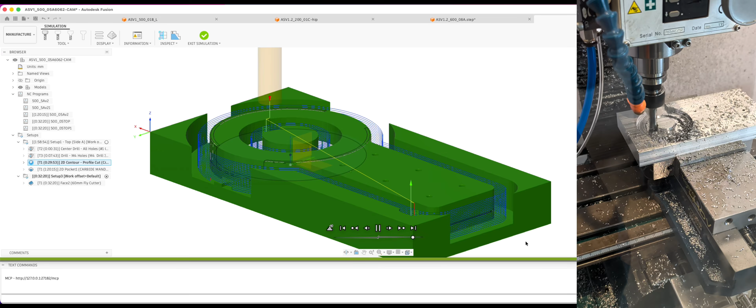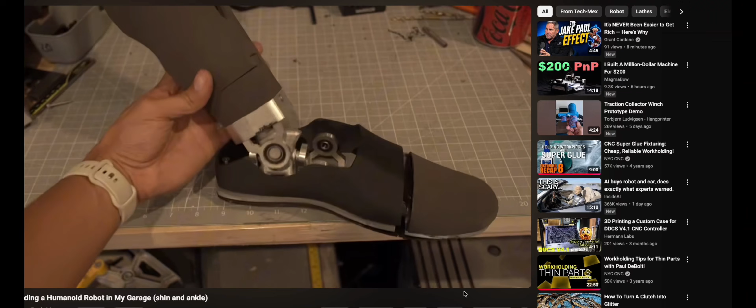Hey, welcome back. Today I'm going to show you how to use AI to help us to machine this part. So, as you have noticed, I have been building in my garage a humanoid robot, and right now I'm going to build the knee for the robot. So, check out my older videos, but first we're going to have to go to the computer.

So the first thing that you have to do is to use your CAM. In this case, I'm using Fusion360. You're going to have to go to the settings and enable the MCP. So in that way we can connect using Cursor or Claude Code. Once you are in Claude, or in this case in Cursor, you can add the MCP. In my case, I already have the MCP, so I just need to enable it.

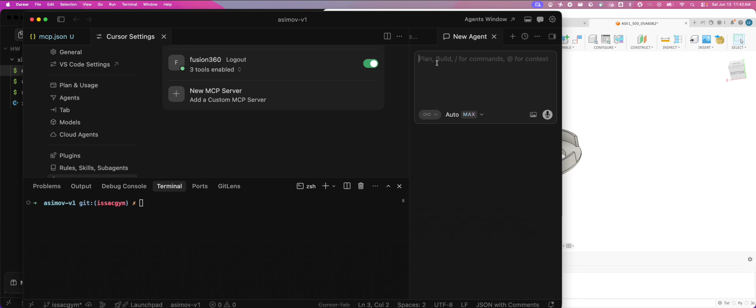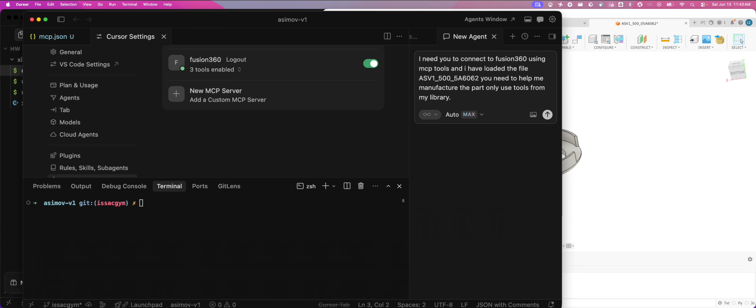So I just toggle it, and now we are ready to start prompting what we want. You have to be super specific. If you pay attention to my prompt, I'm telling it, hey, go to a specific file, connect via the MCP to Fusion360, in order to be able to perform all of the operations that I want.

Also, another trick that I found out is that you have to set up your tools for it to perform better. Again, probably if you have a CNC and you have done this work, you already have that set up. But don't worry, AI will also be able to do it for you.

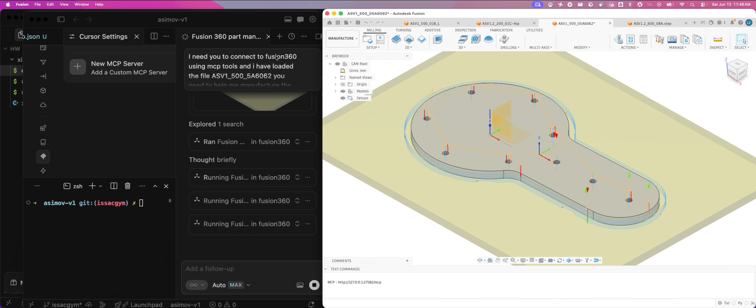Once the AI kind of understands your plan, I'm telling it to look at another bracket that I have done in the past, so I can tell it how I like to do the CAM work on my CNC. So as you can tell here, it actually takes pictures of the part. I was very surprised that it's already looking into the part, and it knows the geometry and understands it very well.

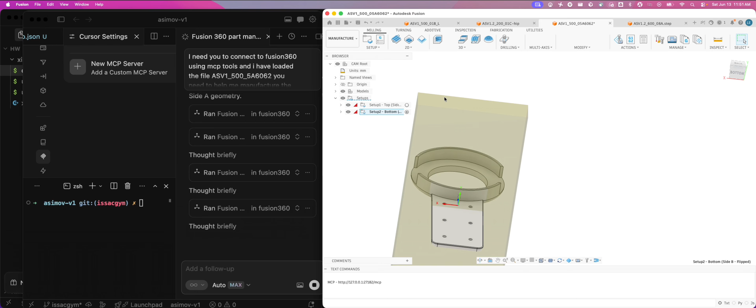The one thing that you're going to notice is that it's burning a lot of tokens. And sometimes it makes mistakes, right? You'll spot a couple things, like right now, it positioned the part standing up. So sometimes it gets stuck that way, and you have to help prompt it back. Like, hey, the part has to be laid down. It's going to take you some time, but sometimes it takes me longer to do all of the CAM work myself.

And now that I understand how I can use this tool, I can basically prompt it to help me out. I also noticed that taking screenshots and pointing arrows helps the AI spot the problems faster. So I think that sometimes you have to treat the AI like an intern, and it will help you. Like in this case, it laid it flat, but it moved it to a corner. And again, you have to tell the AI, hey, it is in the corner, you're going to have to fix it.

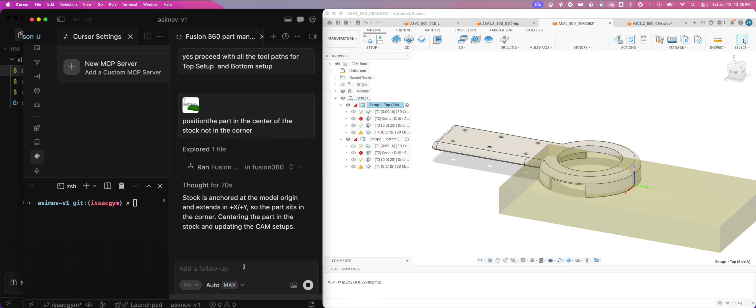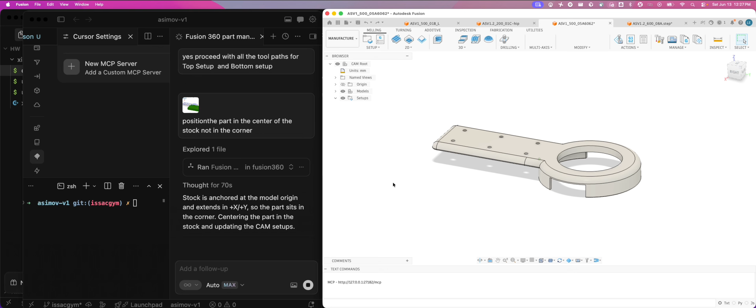By the way, everything that you're seeing there, the AI is adding the setup, adding each of the operations, basically planning all of the different machining for this part. So I'm just inspecting a little bit what it's doing for me. It took maybe about 15-20 minutes for the AI to do this, which for me might take 40 minutes in some cases, because it's a lot of clicking.

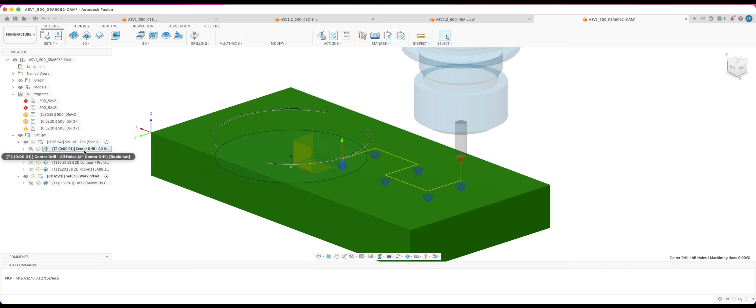But once it's done, I review the work, and actually it's pretty solid. I didn't have to change much. I only changed a couple of things, like in the case of the holes, because I wanted them to go through, so I changed a couple settings there. This is for setting the drill spot. After that, I started simulating to see how it did everything.

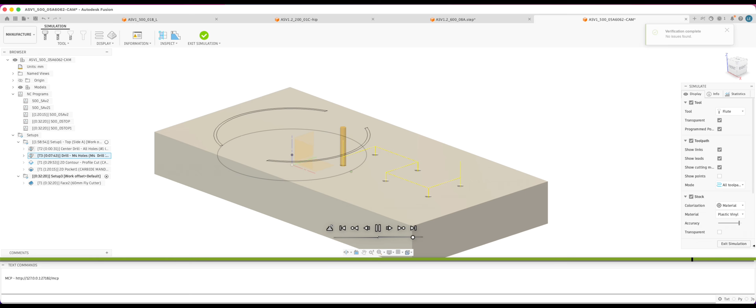And the next one was the pecking. That was the other thing that I changed, because I didn't prompt it. But I'm pretty positive if I prompt, hey, make sure that you are doing pecking on the holes, it will do it. And finally, I'm very surprised it also picked my half-inch end mill in order to do that. But anyways, I think that it did a pretty good job.

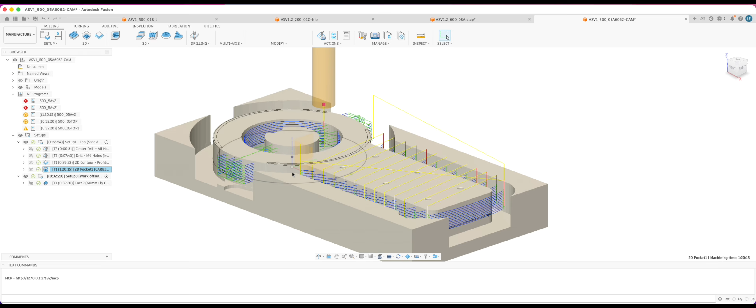And then after that, I just exported it so I can send it to the machine. I didn't spot any issues, and I saw that it cleaned out very well. Then I started to machine the part, and here it is.